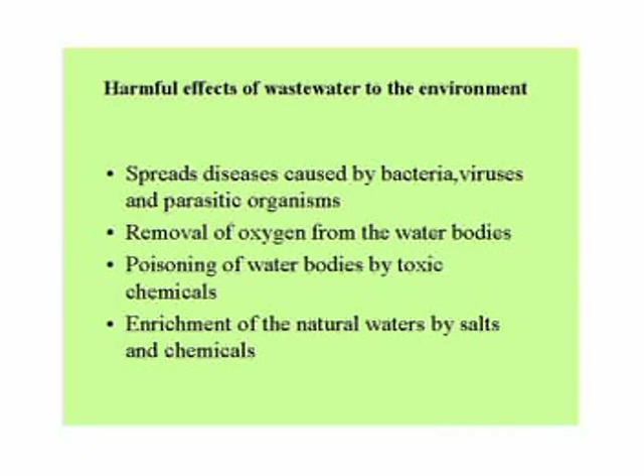It can also cause poisoning of rivers or lakes by chemicals and metals originating from industry, and enrichment of natural waters by salts such as nitrates and phosphates, which then cause abnormal growth of algae and other plants with undesirable results.

Wastewater treatment is the means by which water that has been used and or contaminated by humans or nature is restored to a desirable quality. Water may be treated to any level of quality desired, however, as its purity increases, the cost also increases.

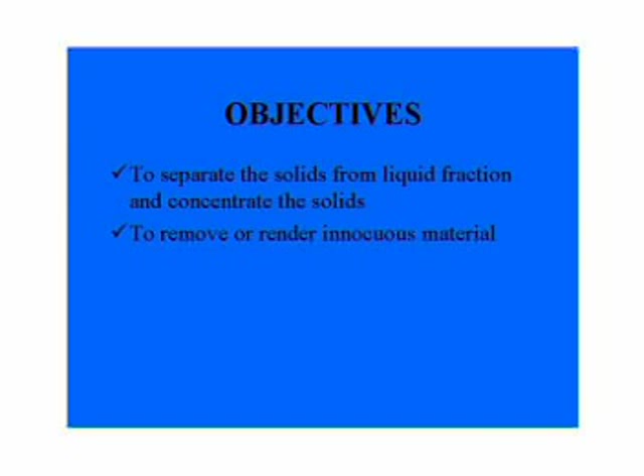The objectives of wastewater treatment are: to separate the solid from the liquid fraction and to concentrate the solids collected from the carrier water, and to remove or render innocuous material that will cause adverse effect when the effluent is subjected to ultimate disposal.

Now, classification of wastewater treatment. The wastewater treatment process is categorized as pre-treatment, primary treatment, secondary treatment and tertiary treatment. Sometimes pre-treatment is more than enough for a particular type of wastewater that can then be discharged without any harmful or deleterious effect to the environment.

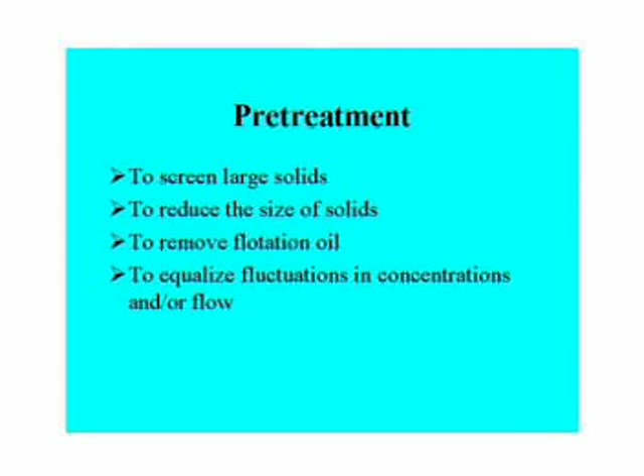Pre-treatment is used to screen large solids, reduce the size of the solids, remove flotation oil, and equalize fluctuations in the concentration and or flow.

Primary treatment includes pre-treatment and refers to the removal of suspended solids either by sedimentation or flotation. Chemicals may be added to remove the suspended particles or sometimes dissolved particles.

Secondary treatment is a biological process by which we can remove or reduce BOD to a certain level. These biochemical processes are mostly aerobic and sometimes anaerobic. A well designed secondary treatment plant can be expected to remove 85 to 95% of both BOD and settleable solids.

Tertiary treatment may be defined as treatment in addition to primary and secondary treatment. It aims at further purification of wastewater, final polishing, reduction of dissolved solids, and disinfection of effluents. These processes may be integrated into a secondary treatment plant or added onto secondary effluent.

Tertiary or advanced wastewater treatment can virtually attain any removal efficiency desired. It is mandatory that the composition and characteristics of wastewater be known and understood in order to design and operate the wastewater treatment plant.

Primary treatments. Processes under primary treatment are screening, sedimentation, equalization, neutralization and coagulation. Screening is the process by which larger suspended and floating materials such as fibers, papers, wood pieces and fruit skins are removed. The conventional screen system is comprised of two units.

The first is known as a coarse screen with 25 to 50 mm size. The second unit is the fine screen, where the opening is 0.8 mm to 6 mm depending on the type of effluent. The accumulated material at the screen must be removed at frequent intervals.

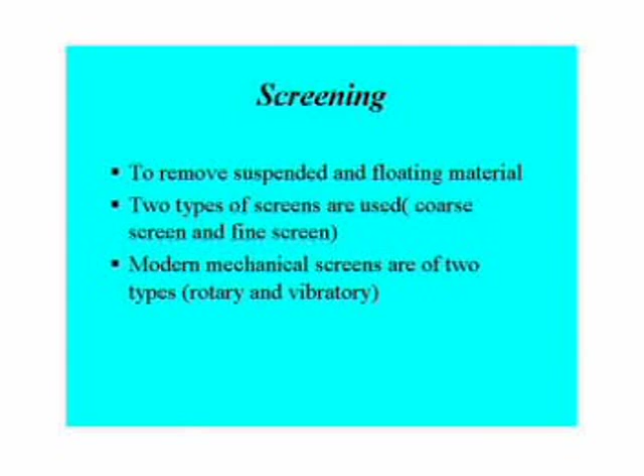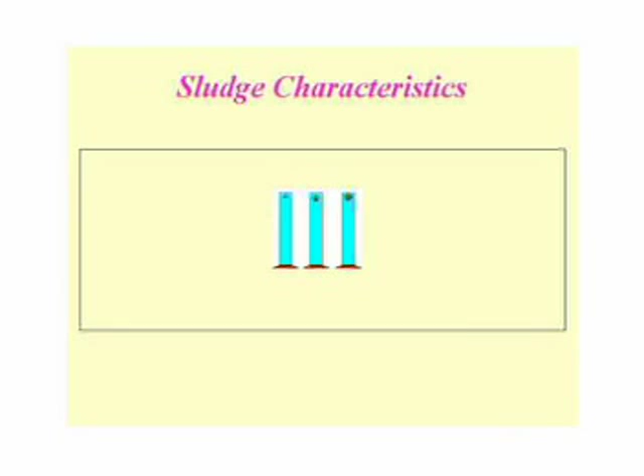Sedimentation is the settlement of solids by gravity. It does not require mechanical accessories and is employed for waste containing high content of settleable solids, or when the waste is given a combined treatment with sewage.

Equalization: different types of wastewater are generated in different parts of industry or different industries as a whole. Different industrial wastewater contains different toxic substances, and it poses a serious threat in the treatment process, the overall treatment process.

Neutralization: waste with extreme pH should not be discarded without treatment. Hence, neutralization is necessary. Depending on the type and volume of waste, neutralizing material and equipment are chosen.

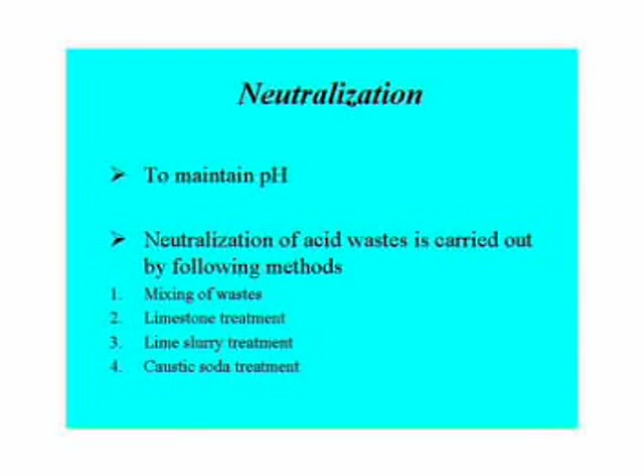Neutralization of acid waste is done by the following methods: one, mixing of waste — mixing acid waste with alkaline waste in appropriate proportion can be followed to adjust the pH, it is the cheapest method; two, limestone treatment; three, lime slurry treatment; four, caustic soda treatment — caustic soda treatment is the most effective method of neutralizing acid waste, and the products formed are also highly soluble in water.

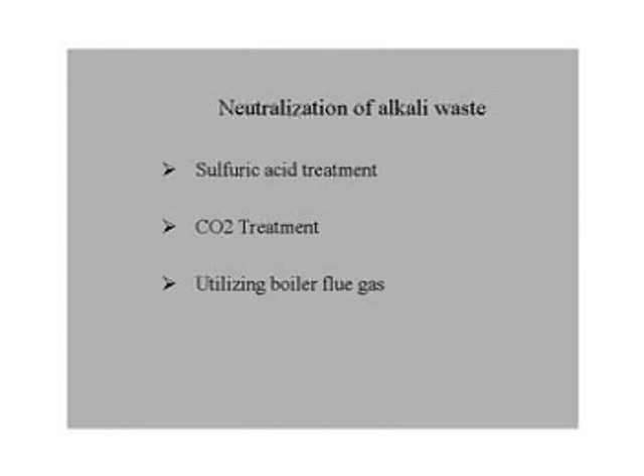Neutralization of alkali waste is done by the following methods: one, sulfuric acid treatment; two, carbon dioxide treatment; three, utilizing the waste boiler flue gas, which is an economical process. CO2 is present at approximately 14% in the stack gases, and reacts with the alkalinity of the wastewater to form carbonates.

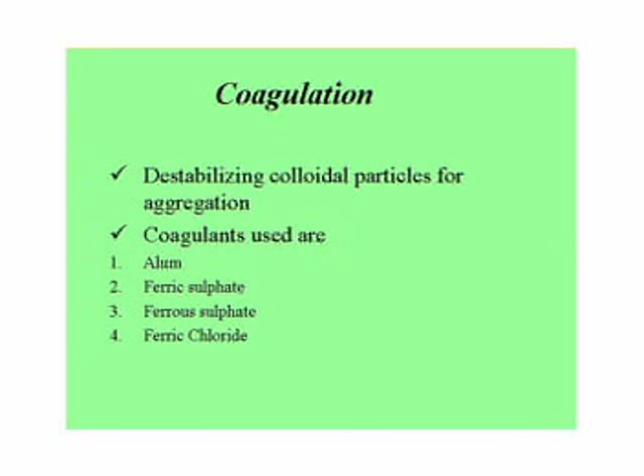Coagulation is the process by which colloidal particles are destabilized by the addition of certain chemicals and consequently aggregated and bound to form a floc which settles rapidly. Normally used coagulants are alum, ferric sulfate, ferrous sulfate, and ferric chloride. Alum is the most popular coagulant used both in water and wastewater treatment.

Alum ionizes in water producing Al3+ ions, some of which neutralize the negative charges of the colloids. Most of the aluminum ions, however, react with alkalinity in the water to form insoluble aluminum hydroxide.

Secondary treatment is the biological process by which objectionable organic materials are oxidized to carbon dioxide and water in the presence of microorganisms, oxygen and nutrients. Bacteria are the major microorganisms carrying out the oxidation.

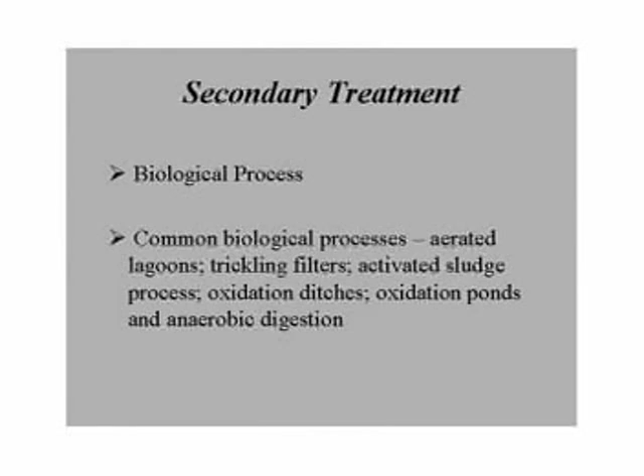The most common biological treatments include aerated lagoons, trickling filters, activated sludge process, oxidation ditches, oxidation ponds and anaerobic digestion. The effectiveness of the treatment depends on the bacterial slime, pH, temperature, nutrients, toxic compounds, etc.

Aerated lagoons are one of the oldest methods of wastewater treatment and still in use in certain areas. There are certain advantages of aerated lagoons: 90% of the BOD removal is achieved and operation and maintenance are much simpler. The major disadvantage is the requirement of more space.

These are large holding tanks, basins lined with cement. Depth varies from 3 to 5 meters.

Trickling filtration is an effective aerobic biological oxidation method used widely in industries. In this method, highly permeable filter beds, made up of rocks of 25 to 100 mm size, are employed. Depth of the bed varies from 1 to 2.5 meters.

PVC media and plastics are widely used as filler or packing material, over which the microorganisms form a floc. Microorganisms working to stabilize the organic waste material are attached to a fixed bed rather than being floating and suspended. Wastewater after primary treatment is sprinkled uniformly over this filter bed through rotary nozzles.

The slimes formed on the stones oxidize the wastewater. Treated wastewater is collected from the bed through an under drainage system.

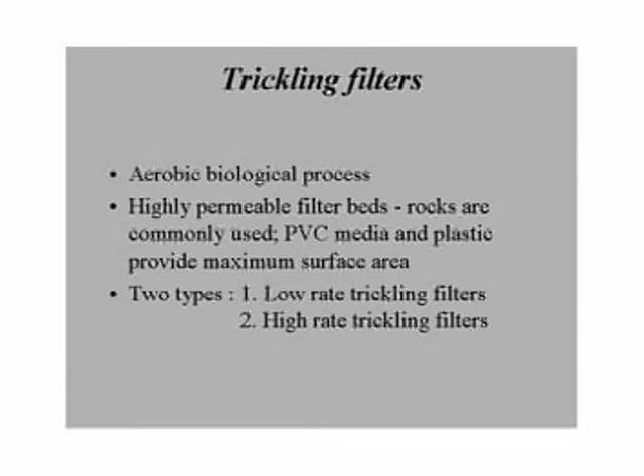Advantages: it produces better and consistent effluent quality, recovers quickly from shock loads, and constant manual attention is not necessary. High cost of construction is the only limiting factor.

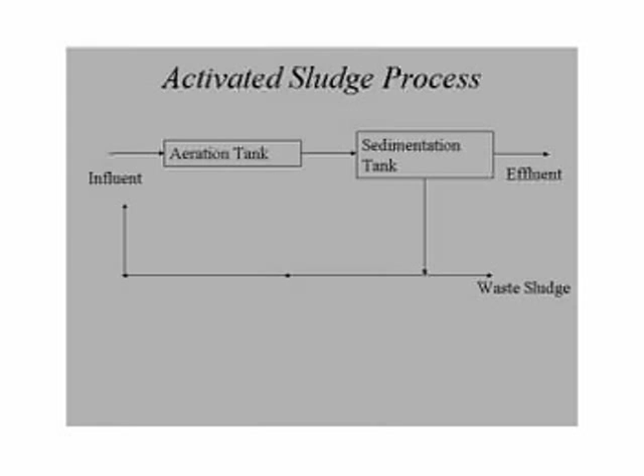Activated sludge process is the most versatile biological oxidation process used in industry and also in the treatment of sewage. In the activated sludge process, there is an aeration basin where the wastewater is allowed to pass through and air is passed through it.

When air is passed, the microorganisms develop in the aeration basin and degrade the organic material present in the wastewater. As the degradation process takes place, the microorganisms also grow and degrade the organic matter to a greater extent. Then it is taken to a settling tank where the microorganisms settle and are recycled back. Hence, this process is called the activated sludge process.

For the growth of microorganisms, we need nutrients. Nitrogen and phosphorus are most important, and when they are in proper quantity, the growth of microorganisms is at a faster rate and degrades the waste to a greater extent.

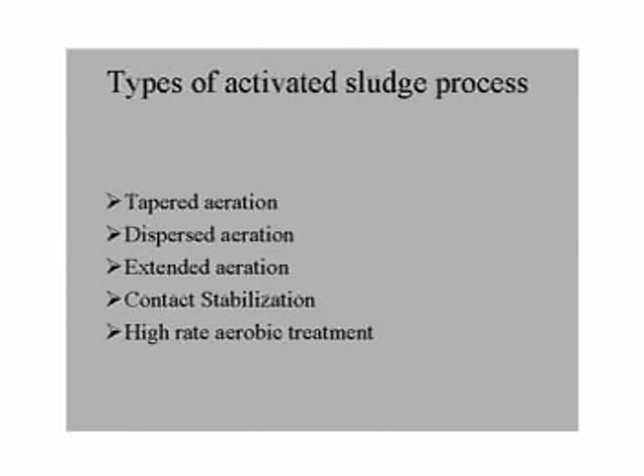The modifications over the conventional activated sludge process are tapered aeration, dispersed aeration, extended aeration, contact stabilization and high rate aerobic treatment systems. In the conventional system, oxygen is supplied at a uniform rate throughout the aeration tank, but in fact oxygen demand decreases along the length of the tank as the waste stabilization process occurs.

So oxygen supply can be reduced progressively, which is termed tapered aeration. In the case of dispersed aeration, instead of reducing the oxygen supply, influent may be passed at several places of the aeration tank. This is referred to as stepped aeration.

If the aeration period is between 8 to 12 hours, it is dispersed aeration. If the aeration period is extended to 18 to 48 hours, this process is known as extended aeration process. By this process, less sludge production occurs due to autolysis of sludge.

The advantages of the activated sludge process: there are several advantages in the activated sludge process. The sludge produced in the activated sludge process is very less. High quality effluent is obtained in a very small area.

With the advantages, there are also disadvantages: 1. Sensitive to shock loads, toxic and high concentration organic substances. 2. The volume and concentration of the return sludge should be monitored regularly. Last and most important is the high cost of operation and maintenance.

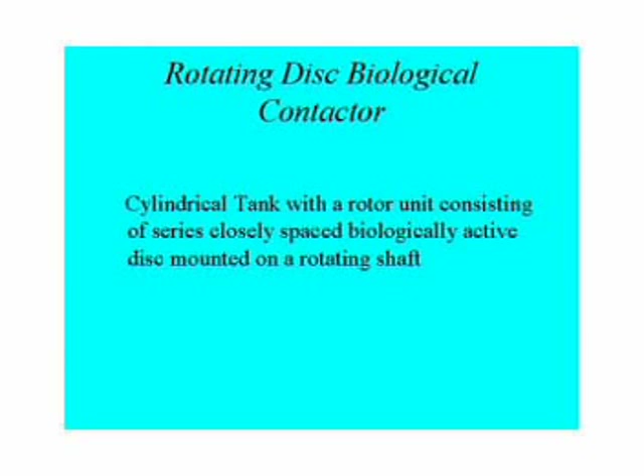Next, rotating biological contactors. These are one of the oldest techniques for treating industrial effluents. In this process, we have a cylindrical tank with a rotating disc mounted on a central shaft. The discs are placed one after another, and when rotated, a thin film of wastewater is formed over the disc.

When a thin film of water is formed over the disc and air is in contact with it, degradation of the wastewater containing organic contaminants occurs. The disc slowly forms a mat-like structure with the help of adhering microorganisms, and in their presence, the organic materials are degraded into simpler substances.

Anaerobic treatment is the process by which complex industrial wastewater is treated with the help of anaerobic microorganisms. It is not a single microorganism that degrades this complex wastewater into simpler substances, but a variety of microorganisms. The overall process converts complex organic material into methane and carbon dioxide.

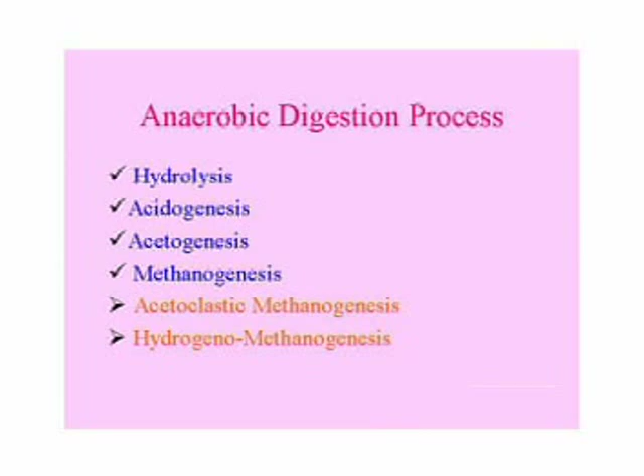The first step is hydrolysis. The complex organic material is converted into a simpler material with the help of hydrolytic bacteria, and through this process it is converted into a range of higher volatile fatty acids.

Next, a group of acid-forming bacteria act on the higher fatty acids and convert them into simpler fatty acids like acetic acid. Then another group of bacteria converts this acetic acid into methane. This group is called methanogenic bacteria, referred to as acetate-utilizing methanogens.

During the degradation process, a certain amount of hydrogen and carbon dioxide is formed. This hydrogen combines with carbon dioxide and gets converted into methane by a group of hydrogen-utilizing bacteria. This process is known as hydrogen-utilizing methanogenesis.

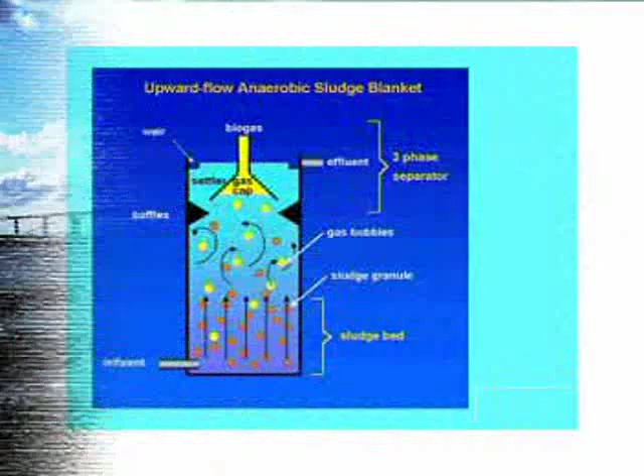Among the several anaerobic reactors, the upflow anaerobic sludge blanket reactor, or UASB, is widely used in industries. An UASB reactor is one where the microorganisms present in the wastewater form a floc-like structure and move from the bottommost part of the reactor to the topmost part.

As it moves from bottom to top, the entire anaerobic digestion occurs. One of the most important things to take care of in an UASB reactor is that the sludge formed should be granular sludge, meaning the microorganism floc is slowly converted into a granular structure.

There are several advantages of this granular structure. As the influent moves from bottommost to topmost part of the reactor, these granules adhere to each other and form a blanket or bed. As the influent moves through, degradation occurs, and as it reaches the topmost part of the reactor, a gas-solid-liquid separator separates the solids, liquids and gases.

There are several advantages of the anaerobic digestion process. One, it produces very little sludge compared to the aerobic process. Two, it produces a valuable byproduct called biogas. Three, it requires very little space. Four, it can treat very high-strength wastewater. Five, it is a low-cost technology.

Tertiary treatment is employed to remove inorganic solids, bacteria and traces of organics. It is otherwise known as polishing treatment. There are several treatment processes in tertiary treatment.

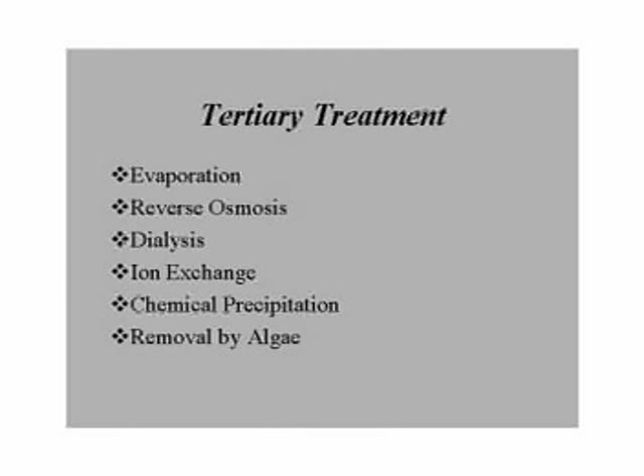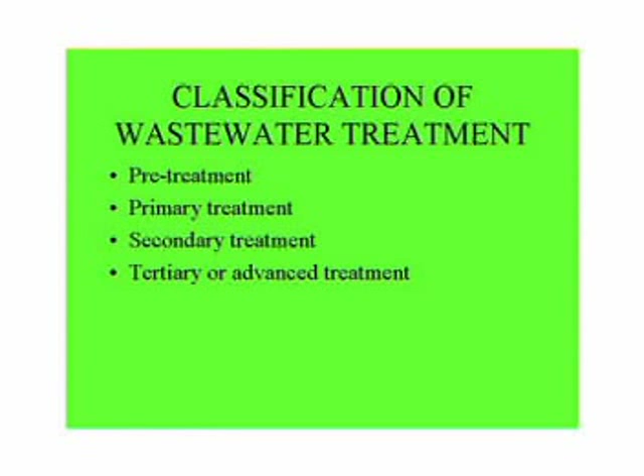One, evaporation. Two, reverse osmosis. Three, dialysis. Four, ion exchange, chemical precipitation and removal by algae. Each has its own advantages and disadvantages. The selection of these processes depends upon the specific requirement of the wastewater to be treated, and hence wastewater treatment consists of pre-treatment, primary treatment, secondary treatment and tertiary treatment.